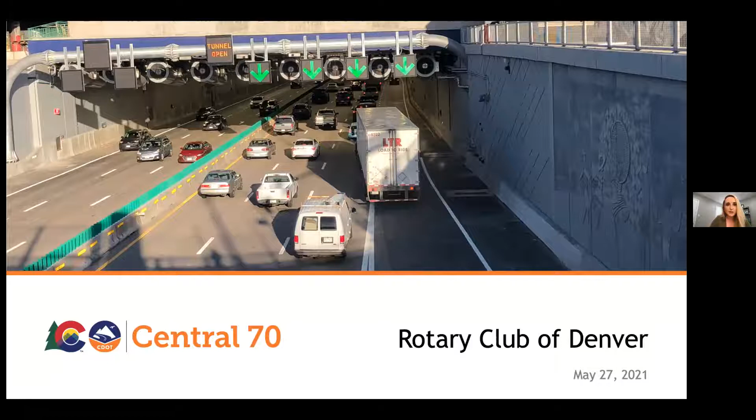The Central 70 project is a 10-mile long project between Brighton Boulevard and Chambers Road, so there's a lot of activity in this area. We see up to about 200,000 vehicles each day, which equals up to about 10 hours of congestion. I'm sure all of us at one point has been stuck in traffic, especially on our way to the airport, so we understand how frustrating it can be when I-70 gets clogged up.

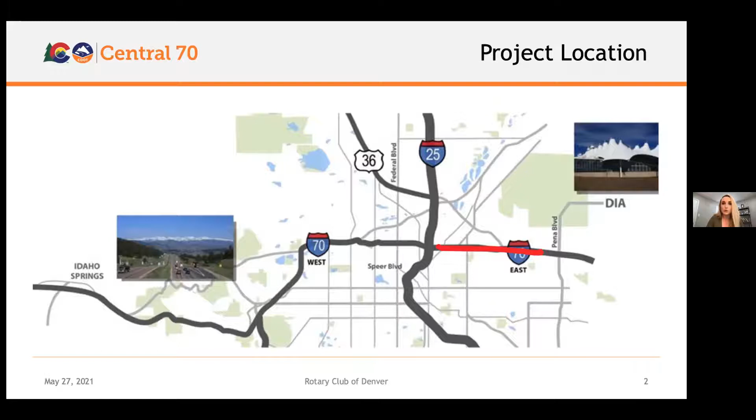Another important thing about this corridor is it's home to about 2,000 businesses with over 11,000 employees, so you have a lot of commuter traffic. You also have neighborhoods directly adjacent to I-70, and of course this stretch holds a lot of tourism traffic, folks coming from DIA heading out west towards the mountains.

So we needed to find a solution to the increased congestion and increased population in the Denver metro area. We started studying this corridor back in 2003 - a 15-year-long study to find the best alternative that would meet the needs of both commuters and residents, and also mapping out what future traffic patterns would look like and building accordingly.

We are going to be adding one express lane in both directions for the entire stretch of the corridor. That will be open by 2023, and the entire project itself will be done by the end of next year. So there is a light at the end of the tunnel, which is very exciting.

We also have a lot of deteriorating infrastructure in this area, so that was something else we needed to look at as part of this project. We had several bridges listed as structurally deficient, meaning we're going in and doing constant maintenance repairs. There might be holes in bridge decks, exposed rebar - those steel rods holding up bridges - and we've had chunks of concrete fall down onto the roads below. So it's just something we're constantly having to monitor and maintain.

And so they just needed to go - they had already met their lifespan. We needed to find something more cost effective for motorists, and as you can imagine, doing so many maintenance repairs means a lot of unexpected lane closures, which is a huge inconvenience. So one of the solutions, besides just replacing the bridges like we're doing out at Peoria, Quebec, and Colorado Boulevard - all of those were listed as structurally deficient.

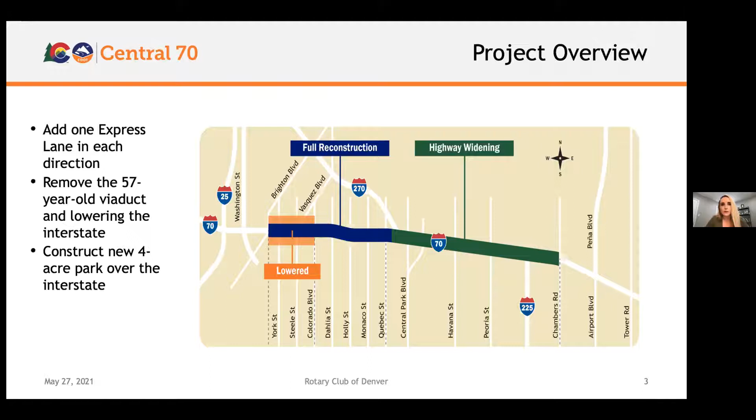Now, the lowered section really was created through a community input process. We did receive a petition from community members that they wanted to see a lowered and covered portion of the interstate to help tie back the communities. And so this is what that concept looks like.

On the left-hand side is a picture of I-70 pre-construction. This is an elevated portion of I-70, and there's a local road, 46th Avenue, that runs directly underneath it. So when you have this big stretch of highway with exposed rebar, it's just not a pretty sight. You have kids who are having to cross underneath it because Swansea Elementary School is right next to I-70.

On the right-hand side is a look at what it will look like in the future. This will be a 4-acre cover park. Over here on the right-hand side of this picture where there's the pink area, that's Swansea Elementary School. So they will get a full-size soccer field that they will have access to during school hours. It'll then open up to the public after hours.

There's also going to be an amphitheater, so a place for the community to come and gather, as well as picnic tables, concession stands, places for food trucks to be, and that will all be maintained by the city and county of Denver. But again, this was a good solution to bring the communities back together after the original I-70 split them in two.

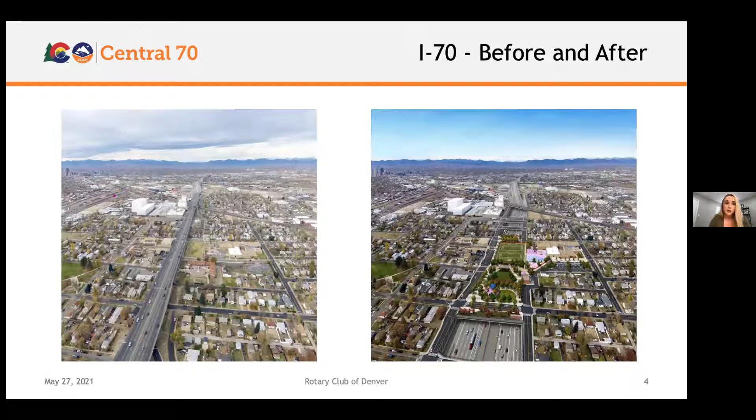So we began construction back in August of 2018. We've made significant progress since then. Unfortunately, I wish I could show you the most recent pictures, but we're going to have to settle for drone pictures from May 20th. This does look significantly different now in just a 1 week period.

On the left-hand side, you have October of 2018. This is when we're just starting out constructing this area. This is pretty much what the old I-70 used to look like. Here on the right-hand side for May 20th, you can see that we started to build out for that future lowered section adjacent to the active lanes of I-70.

So this is where traffic is currently coming in and out of the lowered section. Right now, this section of I-70 has been completely demolished, so it's no longer in existence. But traffic is flowing on this section. And then just to the left of that, you have the westbound I-70 at Brighton off-ramp.

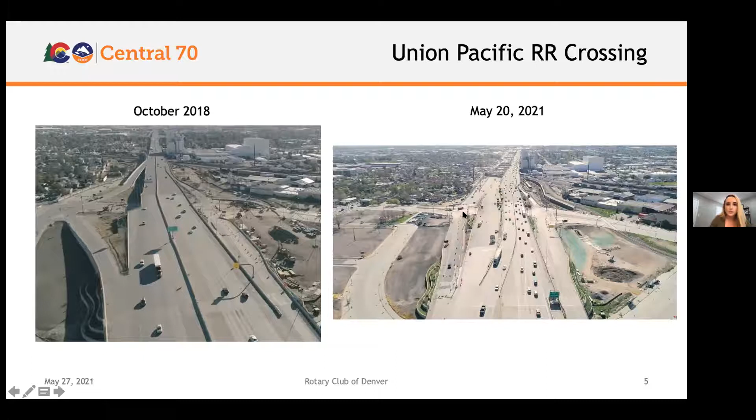Moving further east, this is a look at the Union Pacific Railroad. On the left-hand side, we have a picture of what that currently looks like. That used to be at grade. We had a great partnership with the railroad and our contractor, trying to find a way that we could keep access to the tracks in this area.

Union Pacific serves a lot of businesses in the Denver metro area, including Purina right here. So it was really important that as we're building out this bridge, we aren't halting the train traffic that's coming through the area. So we came up with a temporary bridge solution, so that way we could start to build out the permanent bridge. Once this permanent bridge was built, then we could move those trains onto this, tear out the temporary train track, and then start to build out the complete section of the Union Pacific Railroad.

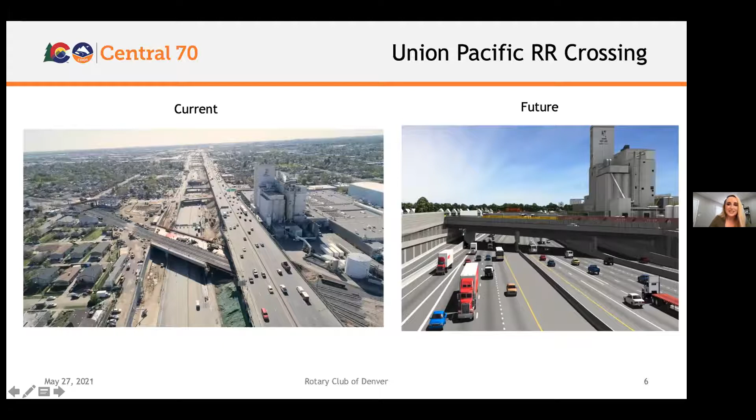On the right-hand side, this is a rendering of what it's like to drive underneath Union Pacific. If you have gone out to I-70 since Monday this week, you have already driven underneath it, but this is just kind of a peek at what that looks like.

Moving further east, this is a look at the future cover park. Of course, we haven't been able to build it out completely because we have this section of I-70 that's in the way. I'll talk about this a little bit later, but the entire section of I-70 between Colorado and Brighton Boulevards needs to be demolished so that we can start to excavate and build out for those future eastbound lanes.

Right now what you're looking at is just the westbound bore of this tunnel. We have temporarily put a configuration in place that will allow for both east and westbound traffic that you see here underneath the cover. But landscaping still needs to be done, of course, so that will start by the end of next year and continue into spring of 2023.

And then you're looking here at a section of roadway. This is 46th Avenue North, which currently runs underneath I-70. In order for us to maintain local traffic, we needed to find a solution, so we decided to temporarily build out this road on the future cover park. Then once this is completely demolished and we have built out the eastbound lanes, we will take out this temporary roadway so that we can build out the soccer field and all of the other amenities.

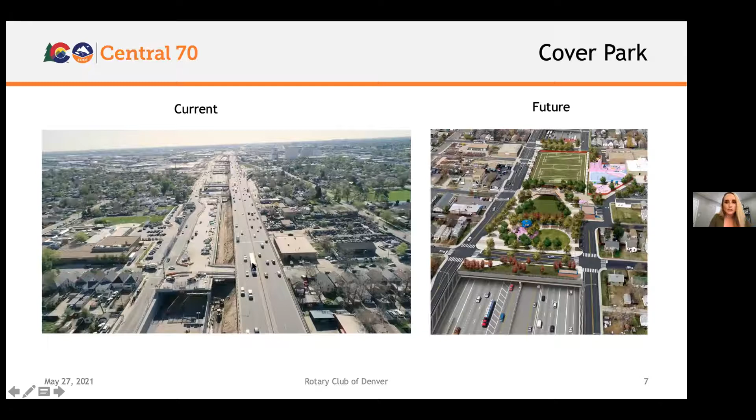Further east is a look at the Steele and Vasquez interchange. Right now we have the on-ramp open for folks to travel westbound. We've closed off the eastbound off-ramp temporarily as we start to demolish the old viaduct. On the right-hand side, you can see what that future interchange will look like, allowing a little bit more safe access on and off the highway.

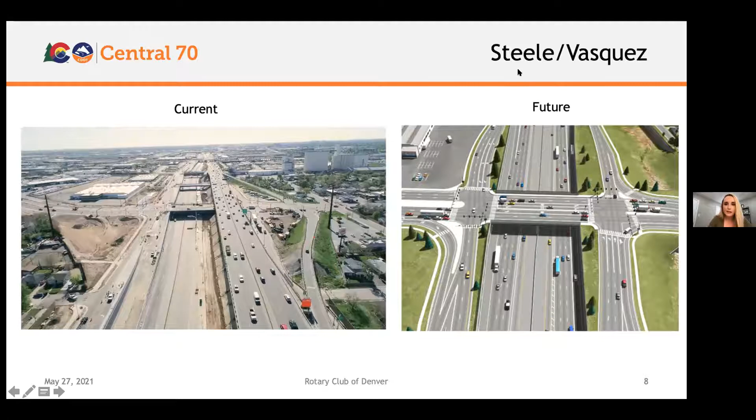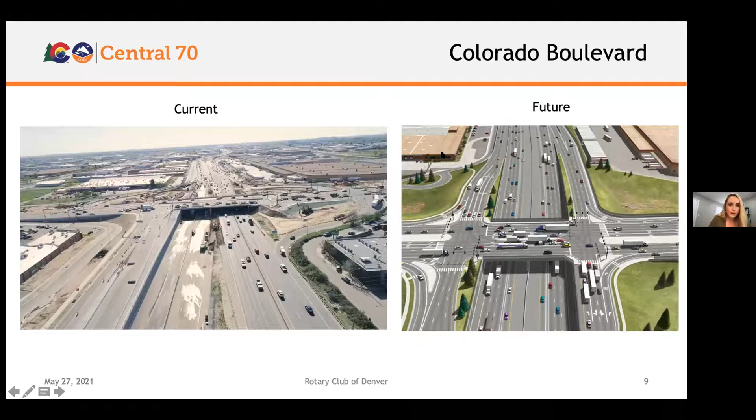Moving further east, this is our center segment, between Colorado Boulevard and Quebec Street. This is back on the original grade of I-70, so it's not lowered. We are widening out I-70 and reconstructing a lot of the bridges in this area. This section has 4 bridges: Dahlia, Holly, Monaco, and Quebec Street.

In order to widen out I-70, we needed to first build out new lanes adjacent to the old lanes and old bridge structure. Once we built these new lanes, we switched traffic over and focused on the middle part. We completely demolished the old Dahlia Street Bridge and did the same process on the other 3 bridges in this section. Then we started to pave the bridge deck, and pave in the center segments or center lanes of I-70.

Once this is all reconstructed, we will finish out the striping, and folks will be driving on new widened lanes of I-70. In the temporary configuration, there's not a lot of shoulder space, but there will be much more shoulder space come fall of this year.

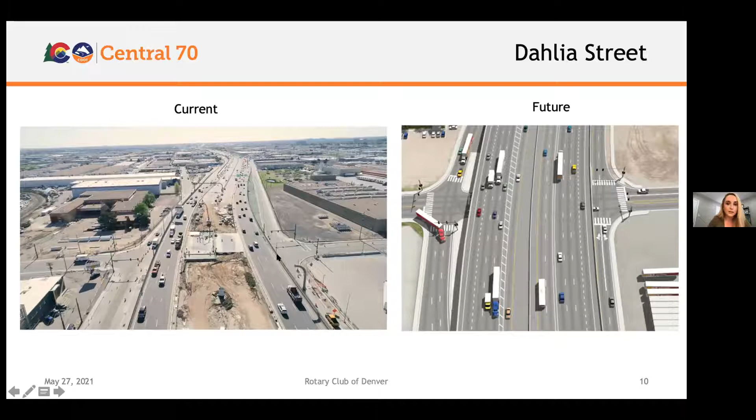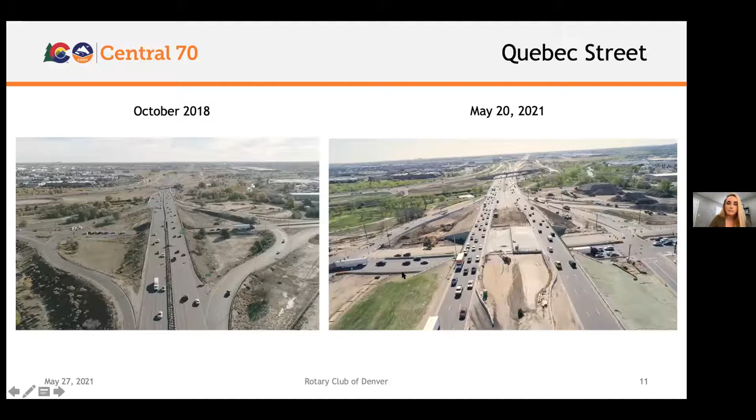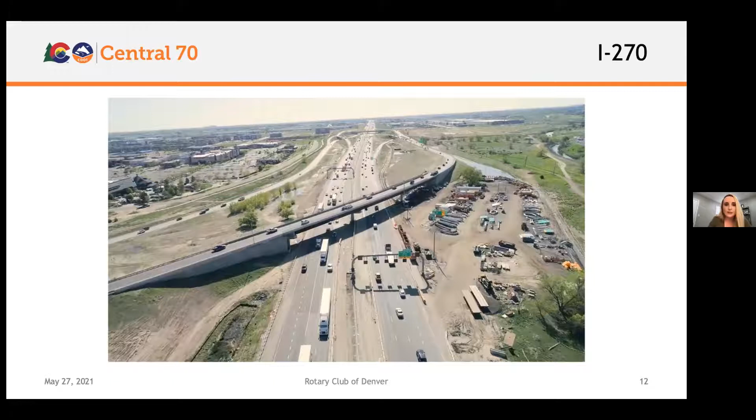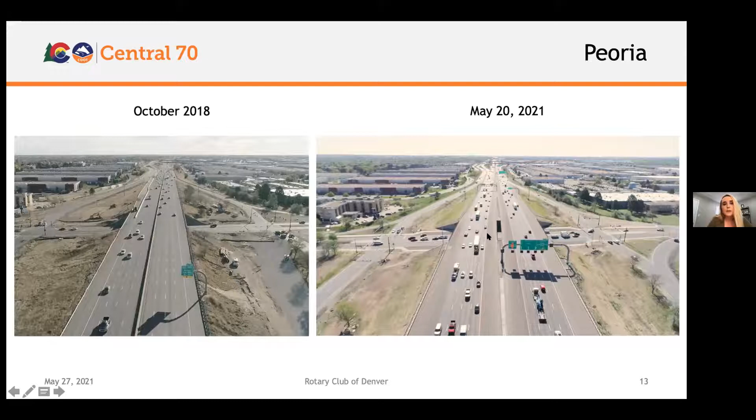So obviously a lot of progress has been made. You could see that in the pictures, but we have excavated about 2 million cubic yards of soil, roughly the same amount of soil that was excavated to build out the Eisenhower Johnson Memorial Tunnels. Eisenhower is also 2 miles long, and our lowered section is 2 miles long as well.

We've also dedicated 3.3 million hours into the project. Some of our operations are 24/7, some aren't. Over in the neighborhood, those aren't usually 24/7 operations, just because we want to be aware that at nighttime, we want to make sure residents are still able to sleep and live their normal lives.

We've also built in new sidewalks, placing 29,000 linear feet of sidewalks. Most places we looked at in our flyover of I-70 did not have sidewalks before, especially in the Elyria Swansea neighborhoods. So now we've allowed for more connectivity within the neighborhoods. Over off of Peoria Street as well, there used to not be any sidewalks in that area, so folks were walking on active lanes of traffic or on dirt to get over to the park and ride that was across I-70. Now there's safe access for folks to walk over there.

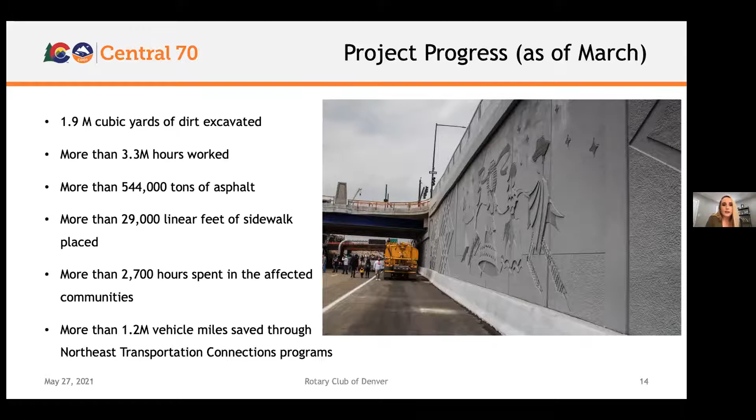We're also providing free bus passes to residents in the neighborhood directly adjacent to I-70. That allows them to use that mode of transportation to get to work, get their groceries, and go to doctor's appointments. We also have community shuttles available through Northeast Transportation Connections, where they can pick up community members and take them to doctor's appointments, since a lot of those folks in the area might not have vehicles as well.

So talking a little bit about the Mile High Shift, which just happened on Monday. As we saw in the picture earlier in the presentation, that was a look at the lowered section. This past Monday at 5 a.m. we did open it up, seeing some congestion on I-70 just as folks are starting to get used to the new aesthetics. Obviously this is much different than what everybody was driving on just last week, right next to Purina.

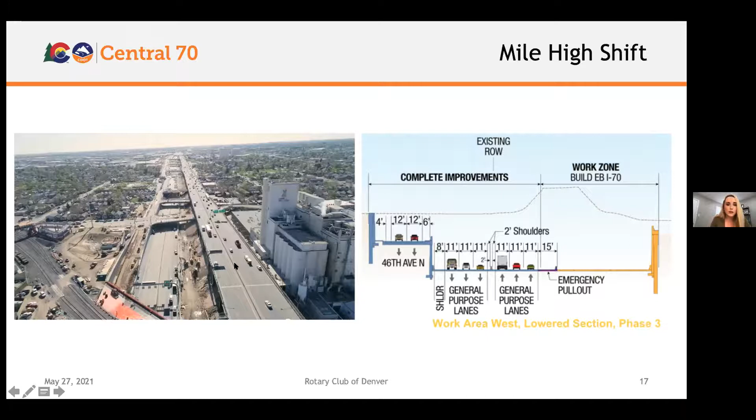Now that traffic's down, as I mentioned earlier, we are already starting to demolish the viaduct. Then we will need to excavate and basically do a copy and paste of what you see today over on the eastbound side. Eastbound should take us about 14 months to construct, and traffic will be in its final configuration by next year. So, saying goodbye to the viaduct.

Kiewit is our contractor for this project. They recently did a very similar project out in Seattle where they demolished the Alaskan Way Viaduct, a big roadway blocking the skyline, right adjacent to some old businesses and apartment buildings. In some cases, the viaduct was just inches away from those buildings. In our case, for the I-70 viaduct, we are also 2 inches away from Purina, and just a few feet away from some residential properties as well.

We are very fortunate that they were on the Seattle project, so they could take lessons learned from there and apply them to our project, making sure we're conducting demolition activities safely. Demolition should take us about 4 to 5 months, so we will be complete by the end of this summer. We'll also be demolishing the viaduct in sections.

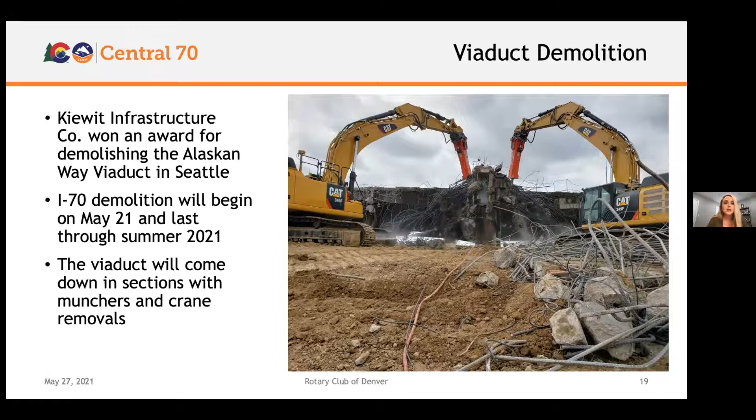I think our number one question is, are we blowing up the viaduct? As cool as I know that would be, we just can't do that given how close we are to businesses and residents in the area. So we have scheduled out different sections that we'll be demolishing, and that's all on our website in case you're interested in seeing where we'll be and when.

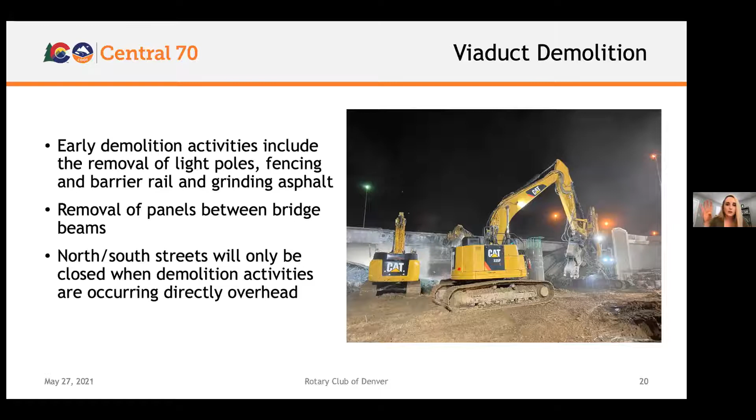Prior to demolition, we have had to go in and remove the old light poles, remove barrier, and start to grind out the old asphalt, so that we can start to remove the viaduct in pieces.

There are also a lot of environmental protections in place. With any demolition activity there is going to be dust, whether you're demolishing a home, a building, you name it. But we have a lot of dust mitigation strategies in place. We have what's called a misting cannon—think of those snow machines you see at ski resorts that make snow. We have something similar that's misting out the dust, collecting all those dust particles and making sure it settles to the ground instead of getting dispersed into the neighborhood.

We also have water trucks with fire hoses that work to wet down dust. We're very cognizant of weather conditions, so if there's going to be windy weather, we will not be doing demolition during those times. Or if wind just picks up as we're doing it, we will stop activities so that dust doesn't fly over into the residents.

Kiewit Meridiam Partners, our contractor for this project, has a noise variance with the Denver Department of Public Health and Environment, so they must stay within a certain noise threshold. If they think their construction activities are going to exceed what's allowed, they have to give residents in the neighborhood a hotel voucher, so they have the option to stay at a hotel for the weekend or however long we're doing demolition activities, so that they're not impacted by noise.

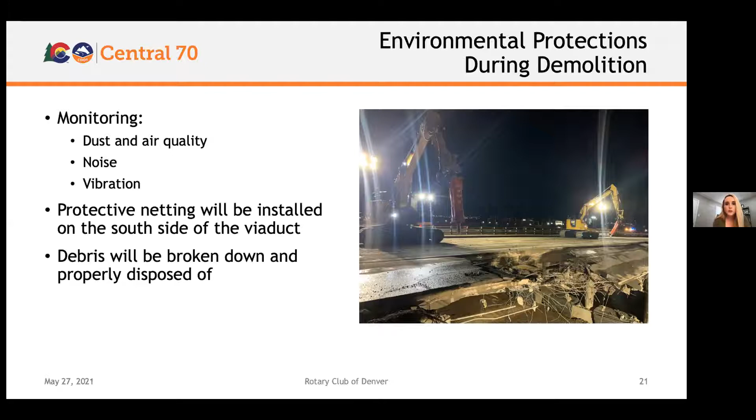Wrapping up here, as I mentioned before, we have our community office hours, and we do have a bilingual community liaison. The section of Elyria-Swansea predominantly identifies as Hispanic, so we want to make sure we are as accessible as possible. She's going out into the community, especially now that COVID restrictions are loosening up, so she can have one-on-one contact with members of the community, giving a more friendly face to the project so folks know they can come to us with any questions or concerns.

There are a lot of ways to get a hold of us for this project. We have an e-blast that goes out every Friday, so you'll be alerted if there's any upcoming construction impacts or road closures, so you can plan ahead. We also have text alerts available that will send anytime something major is happening. We won't spam you with texts, since we're doing a lot of construction activities, so this will only be sent out if it's something that will impact a large amount of the public.

We also have a lot of community-focused ways to get a hold of the community. We have door-to-door flyers, making sure we're connecting with folks face-to-face when delivering them. We meet with local businesses, and we also have realtor boxes set up around the community with fact sheets about upcoming work.

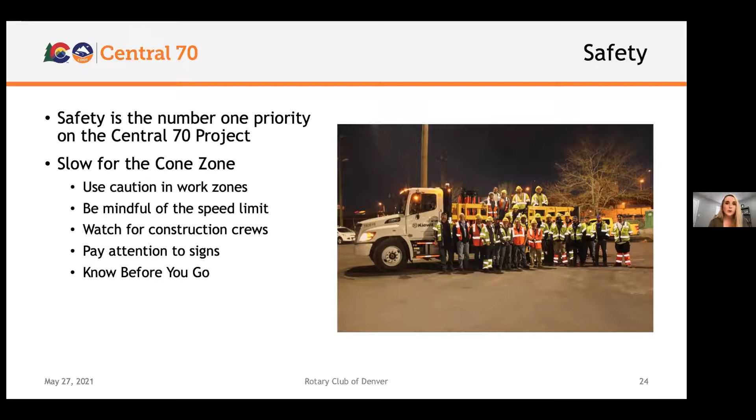Also, we do have quite a bit of traffic shifts, especially the Mile High Shift I was just talking about, so it's going to feel different. We need everybody to be very alert as they're driving through this area and prepared for any new changes, such as new curbs or new striping.

Also for COVID, we were again very fortunate to have Kiewit as our contractor. They took COVID-19 very seriously, so they increased sanitation, and everybody had to follow social distancing and wear face coverings. Even though workers are working outside, they still work pretty closely with each other, so they needed to uphold all the COVID policies. Anytime somebody showed up sick or had potentially been exposed to the virus, that entire crew gets sent home to quarantine. So we did not have any outbreaks as part of this project.

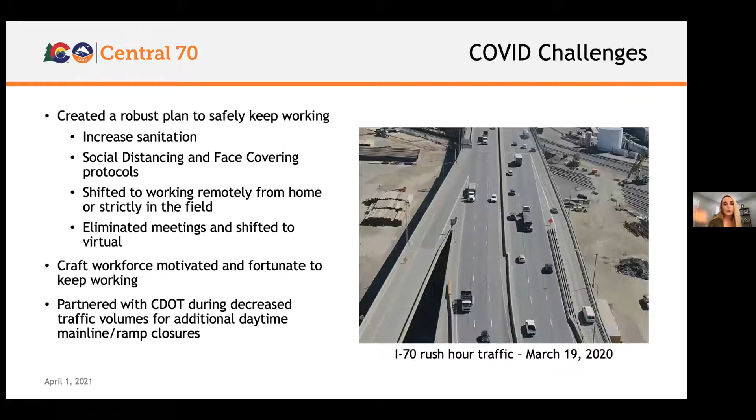With COVID-19, we were able to finish the east segment several weeks early, just because we saw less traffic on the roadway. We were able to take advantage of doing daytime lane closures, which we don't normally do as part of this project, so we were able to finish out the paving. This also really helped us in the center segment between Colorado Boulevard and Quebec Street.

And now I will open it up to anybody who might have any questions for me.